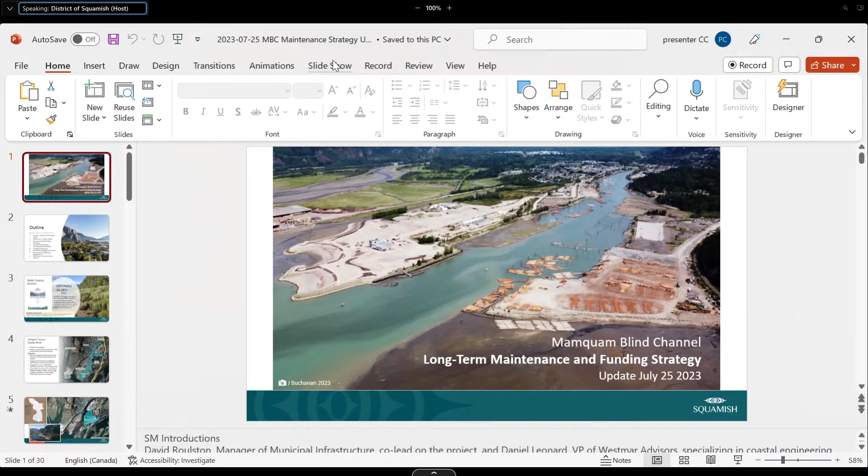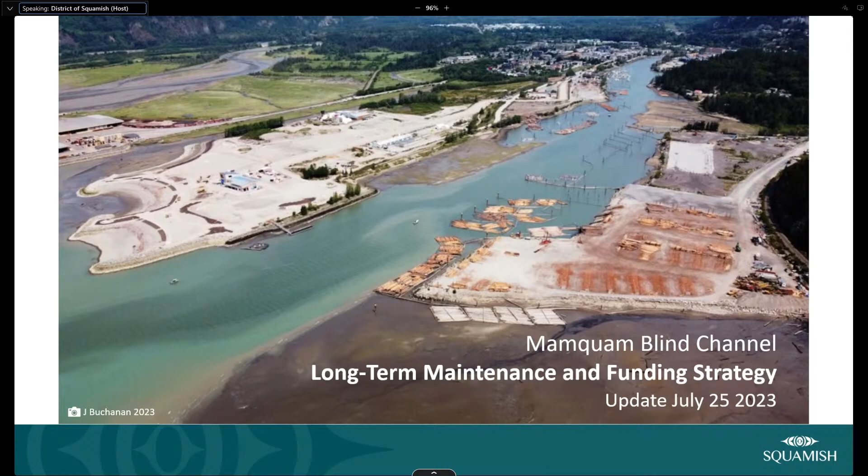Thank you. Hello, Squamish Council and community tuning in. My name is Sarah McJannet, a community planner. With me, I have David Roulston, manager of municipal infrastructure and co-lead on the project, and also Daniel Leonard, who's vice president of Westmar Advisors, a firm specializing in coastal engineering and marine infrastructure projects who's been engaged on this project.

So today, our purpose is to present an early draft of the Mamquam Blind Channel Maintenance Strategy to solicit comment from council on our work to date prior to seeking broader community input. We'll situate the strategy, speak briefly to the work plan and our engagement activities since we introduced the project to you last April. We'd like to summarize the draft strategy formation, including guiding principles, review of channel maintenance options and funding tools, and then talk to the preferred options emerging from discussions with our community working group, as well as cost estimates for maintenance work. As noted in the staff report, we're aiming to engage with the broader community, and we've shared some next steps for additional activities before developing final recommendations and bringing the strategy back to council in the fall.

So in 2016, the OCP update identified several policies and guidelines for channel maintenance, dredging, and restoration. You can see policy 20.24E, which set intention to address navigability for transportation access, recreation, and commerce while minimizing impacts. Further to that, leading scoping and collaboration around a channel maintenance strategy was also identified and prioritized in our Marine Action Strategy in 2018.

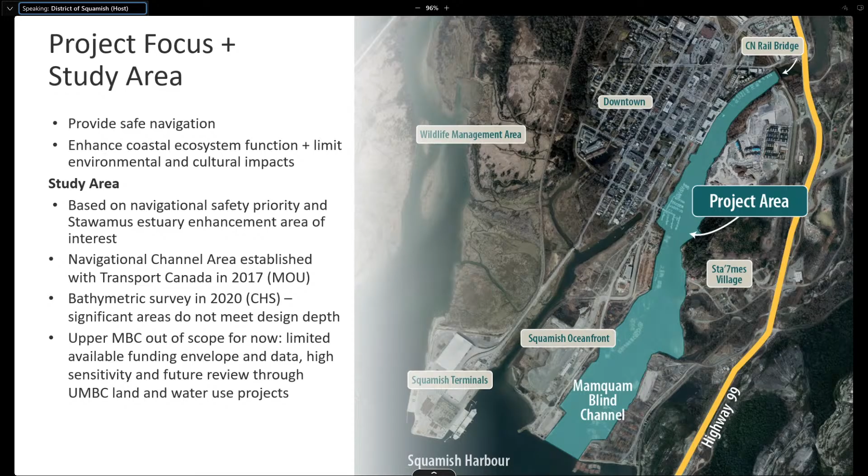I also just wanted to highlight that the channel maintenance study area is on the doorstep of Stá7mes Village and community, where the Stawamus River estuary drains into the Mamquam Blind Channel. The updated area in blue shows the Squamish Nation's expanded lands at Stá7mes that were legally transferred to the nation in 2021 through the addition to reserve process.

And in the draft strategy, we have highlighted the cultural significance and importance of the channel to the Squamish people, where many known seasonal village sites were located and many marine resources were abundant. The Squamish Nation has a strategic plan that includes goals for protecting and managing their lands and waters, including protecting against loss of reserve land from erosion and supporting environmental restoration and sustaining the community.

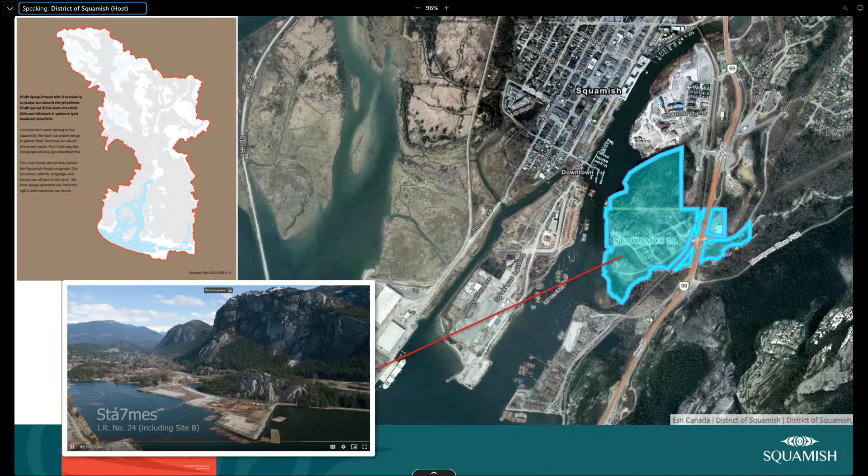And the nation is also, as we presented in the Marine Access Review last month, undertaking significant comprehensive land, marine, and capital planning for Stá7mes and Site B to the south, which is also owned by the nation. So we've been engaging Squamish Nation staff to staff through this project, and we look forward to continued collaborative work. We hope that this work will also help connect with and support the nation's future planning and potential for partnership in future as well. That's just an image of Stá7mes and Site B from the nation's website.

Okay, so in terms of project stages and key tasks, we're in stage 4 of our original project work plan that we presented.

Initial stage 1 involved the scoping, procuring technical services of Westmar, and engagement planning. Stage 2 is all about data gathering and preliminary technical review: review of the bathymetric information, sediment quality data, the navigation channel design, vessel considerations, etc.

In stage 3, through the end of 2022 and earlier this year, we engaged Squamish Nation, other governments, and our community working group in technical review of data and approaches and potential dredging opportunities. As part of this stage, we also talked about benefits and impacts of dredging, as well as what happens if we do nothing.

In stage 4, we've assembled this draft report with maintenance and long-term funding strategies for your initial review to talk about initial directions, and then forthcoming input from council today and from community will help inform how to address dredging and channel enhancement options going forward. And then in stage 5, we're going to summarize all the final recommendations and bring that back in the fall.

A big shout out to our working group, which was formed last summer. Many of them are here with us today in the audience. We have a total of 17 members, a larger group than we had initially set out to include, but it was fantastic to have all of the participation.

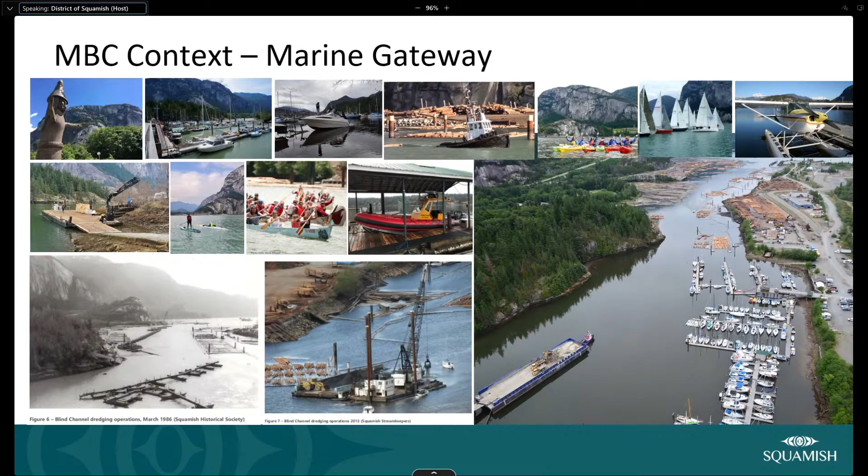Essentially, it's highlighting and acknowledging the cultural and ecological importance of the lands and waters in the channel, respect for Skwxwú7mesh Úxwumixw, rights and title, advancing reconciliation, progressively restoring channel health, preserving safe access, prioritizing waterway safety, and finding a program that's sustainable, practical, and financially viable, designing for future needs, especially in light of climate shifts and new marine opportunities. And also the principle around ensuring benefits and costs are shared amongst the broadest group of beneficiaries in the community. So that's the guiding principles in a nutshell.

I'll just turn it over to David to walk through a couple of other salient points as well.

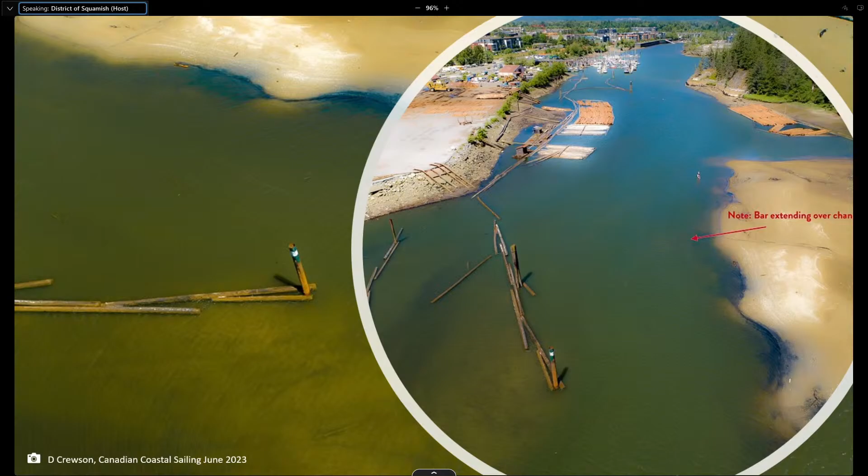In order to determine an appropriate design depth of the channel, Westmar reviewed vessels that use the channel along with their under keel clearance, which is the clearance between the deepest portion of the boat and the channel bed. Various dredge depths were evaluated to determine what percentage of the time those vessels can safely navigate the channel. Based on that review, it was determined that a dredge depth of -2.6 meters chart datum would allow the largest vessel that uses the channel to safely navigate about 85% of the time. To achieve that depth through the whole Mamquam blind channel would require a total dredge volume of 68,000 cubic meters.

We have collated sediment data from past data collection exercises, including the 2013 dredging program that the district undertook, as well as testing from some private water lot owners. The findings of that review indicate that some areas have mercury and hydrocarbons based on past industrial use, and all areas have elevated copper, which is a result of Britannia Beach mining activities over the past century.

The areas with mercury and hydrocarbons will require sediment to be disposed of at a certified landfill, and disposal at sea may be possible for areas that are free of mercury and hydrocarbons, but engagement with federal regulators is required to confirm that. Disposal on land is also considered viable, particularly for near shore sites where sodium and chloride are not expected to have any adverse effects. Disposal on land could take place in the form of land raising, land creation, or potential habitat compensation work within intertidal areas.

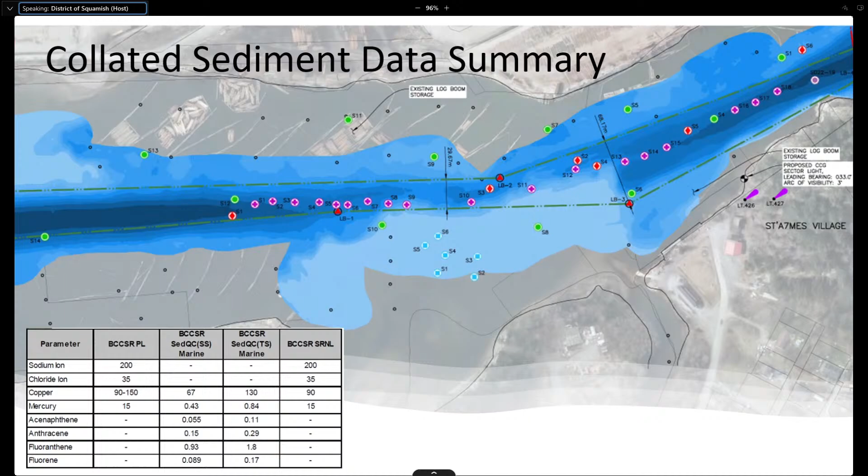The project team evaluated a full range of options to assist with decision-making. This included doing nothing, status quo; a stopgap, which focuses dredging work at the mouth of the Stawamus River; a focus dredge, which would dredge the southern portion of the channel, south of the proposed pedestrian bridge, to a depth of -2.6, and north of the pedestrian bridge to -1.6. Option D is to dredge the entire channel to -2.6, and the highest service level is to dredge the entire channel to -3.2, which would allow all vessels to navigate during all tidal conditions.

So option B and C were identified as the preferred options by the working group, and I can go into further detail on those two options.

Option B, the stopgap, is shown here, focusing work at the mouth of the Stawamus, which is currently the key pinch point. The order of magnitude cost estimate for that is $650,000, based on a number of assumptions that will need to be confirmed at the detailed design stage, for items like how we dispose of the dredge material and what's required from a habitat compensation perspective. This option would address the biggest pinch point in the channel right now, with an aim to improving navigation at low tides.

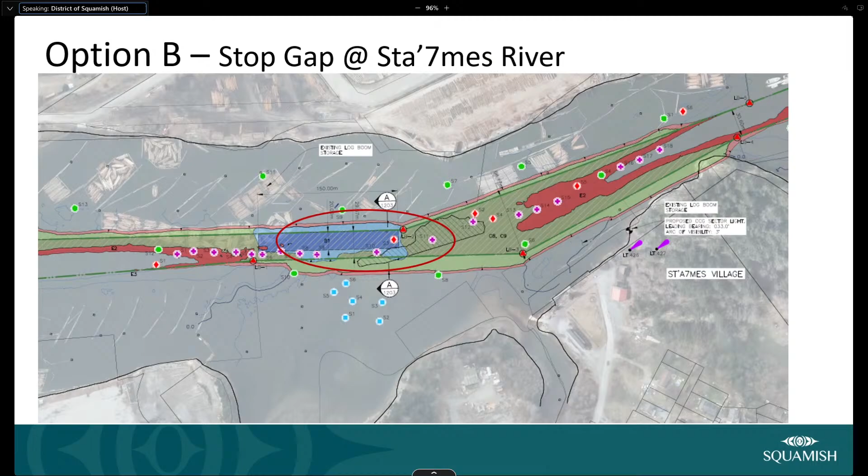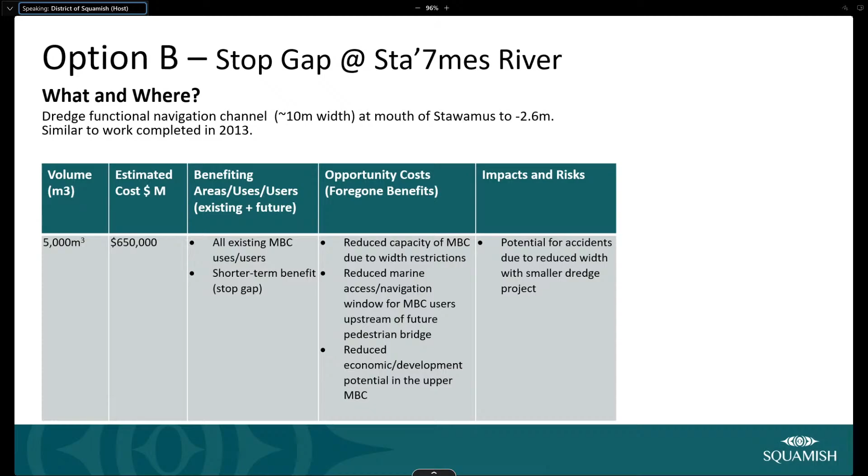This slide provides further details on option B. The key notes are that the estimated volume is 5,000 cubic meters at an estimated cost of $650,000. This would benefit all users of the channel, given its location fairly far south in the channel. It is considered a shorter term benefit due to the limited dredge volume and also because of its location at the mouth of the Stawamus River, which is continually producing sediment at about 2,500 cubic meters per year. It's notable that this is not a full service option, and there are opportunity costs and risks with not proceeding with a more comprehensive option, including reduced marine access that will limit economic potential. There will also remain risk for marine accidents due to the reduced width of the channel achieved with this limited option.

Option C is the focus dredge, shown in hatching on this slide. This is a significantly expanded option beyond the stopgap. Most of the dredging area is in the southern portion of the channel, with a limited portion towards the north end of the channel near the CN rail bridge.

Some highlights of option C: it includes a total volume of about 55,000 cubic meters at an estimated cost of $3.5 million. This option would benefit existing and future marinas within the channel, recreational users, and marine industrial users. However, it doesn't provide a full level of service for all users, so there would be some opportunity costs associated with reduced marine access, including reduced economic potential.

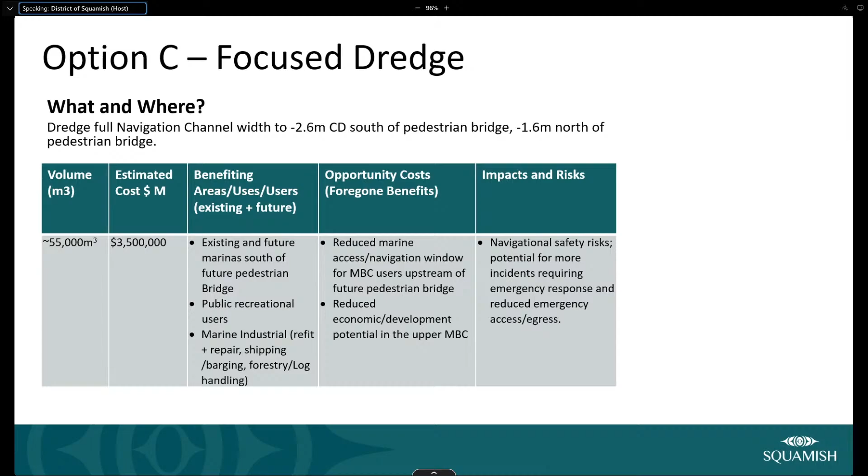With that, I'll hand it back to Sarah to discuss Squamish Nation feedback. Thanks, David. As mentioned, we've engaged staff to staff with Squamish Nation through the formal referrals process, and held staff to staff meetings. Squamish Nation staff also joined an in-person working group meeting with the larger working group, which was great. In terms of the review of options, option C has been highlighted by the nation as the middle ground and the best option to balance environmental needs with costing and cost benefit considerations.

They're very interested in seeing beneficial reuse of uncontaminated material rather than disposal at sea, and have highlighted a focus on the Stawamus area and the estuary area for restoration. They liked the idea of keeping materials close, and also highlighted fill potential for various sites to be evaluated. The nation also highlighted the importance of archaeological assessment prior to any works along the shorelines, and interest in seeing mitigations to reduce impacts on the ecology of the area, such as using silt curtains to avoid impacts to fisheries.

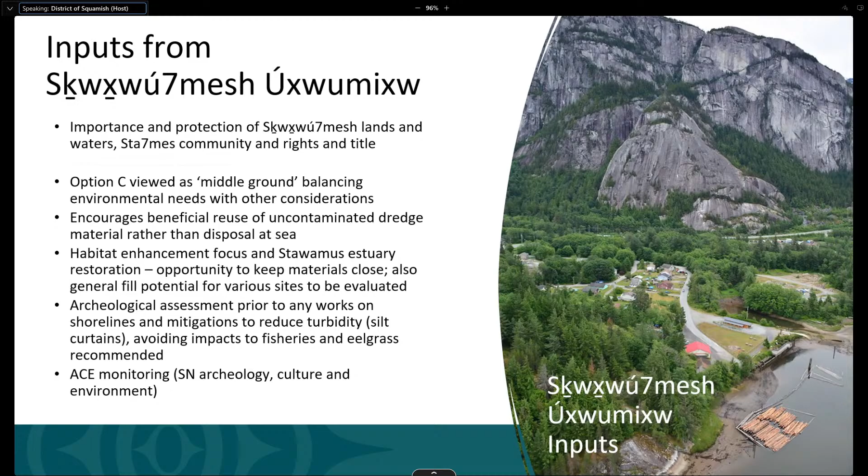There are several variables and uncertainty related to the costs, which we've done our best to assess at this point with appropriate contingencies. One is how much of the material is actually contaminated and can't be disposed of at sea or for beneficial reuse, and has to be taken to a landfill. We have historic data from various projects along the channel, and we've tried to assess appropriate levels of contamination versus uncontaminated materials. But until you actually do a drilling program, you won't know the exact amount of contamination.

As mentioned, the requirements to achieve approval for disposal at sea are getting harder, and the likelihood of getting approval is going down. So we can't really say at this point whether we would get approval for disposal at sea for this project. If we don't, then all of the material would have to go on land, either for beneficial reuse or contaminated or uncontaminated landfill.

We feel much more certain about the actual cost of doing the dredging. We've worked with industry partners, and we have several projects on the go right now, so our level of certainty with respect to actually doing the dredging is much higher than these other issues I mentioned.

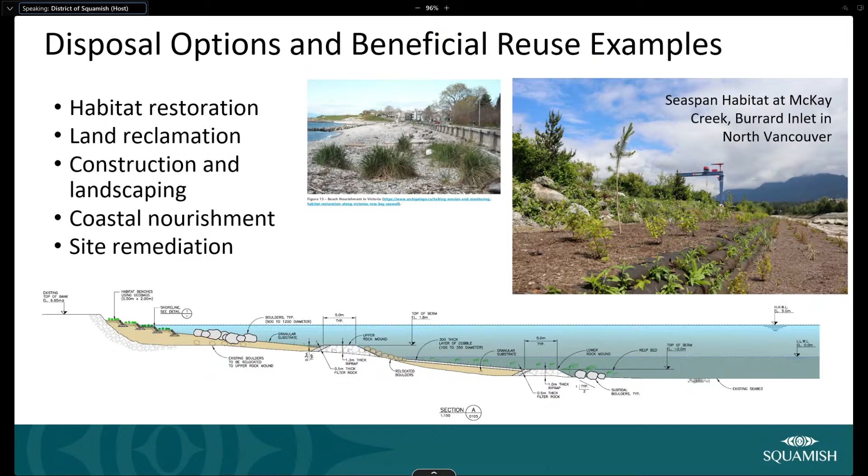The project team, in consultation with the finance department, has reviewed available funding options. There is a notable absence of dedicated federal and provincial funding for navigational maintenance outside of major harbors and ports, and dredging hasn't historically been the requirement of local governments. This leaves a gap in funding, which is a primary reason work hasn't been completed in recent years. Layered onto that are significant financial pressures facing the district, based on funding shortfalls identified in the asset management plan, which challenges the district to make significant investments in dredging.

Based on the review that the project team has completed, funding approaches recommended for further examination include a local service area tax for specific properties that would benefit, user fees and charges, voluntary contributions from users of the channel. We would of course pursue any available federal and provincial grants, however those are uncertain.

For each of the preferred options, the project team intends to complete further analysis prior to completion of this strategy based on council sentiment. That would include grant funding if available, a local service area which could range in funding anywhere from 0 to 100% of costs, the same with general taxation, and then other potential funding sources like user fees and voluntary contributions from different users.

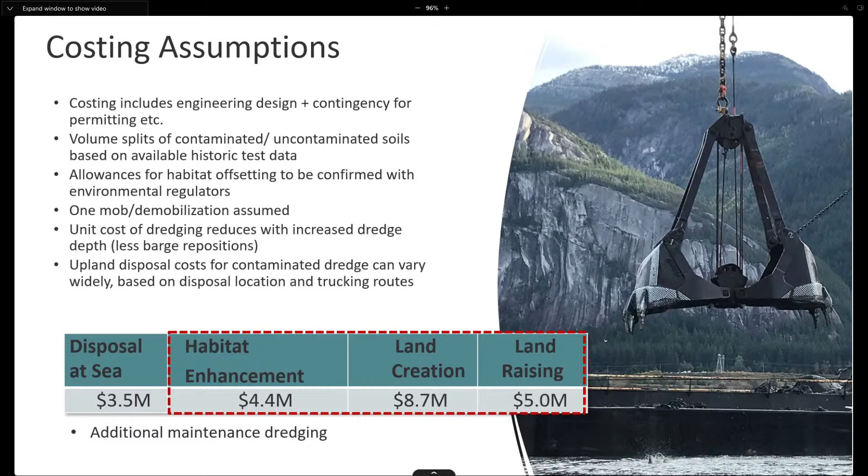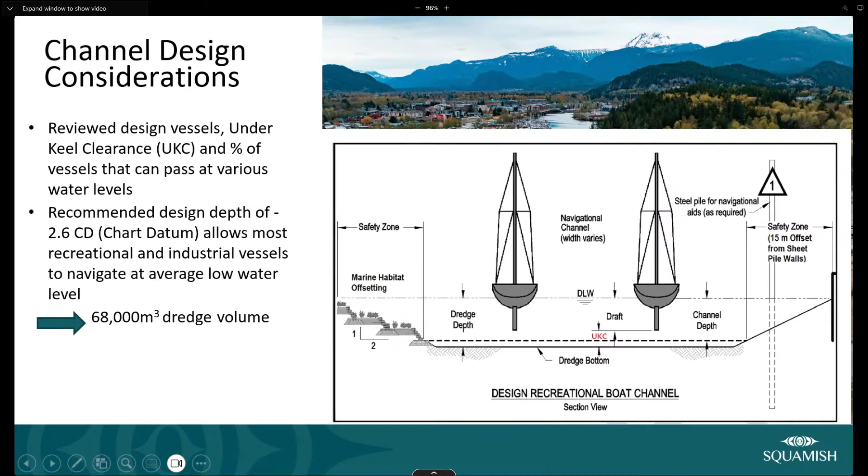That's one more. There we go. Oh. And two more. There we go.

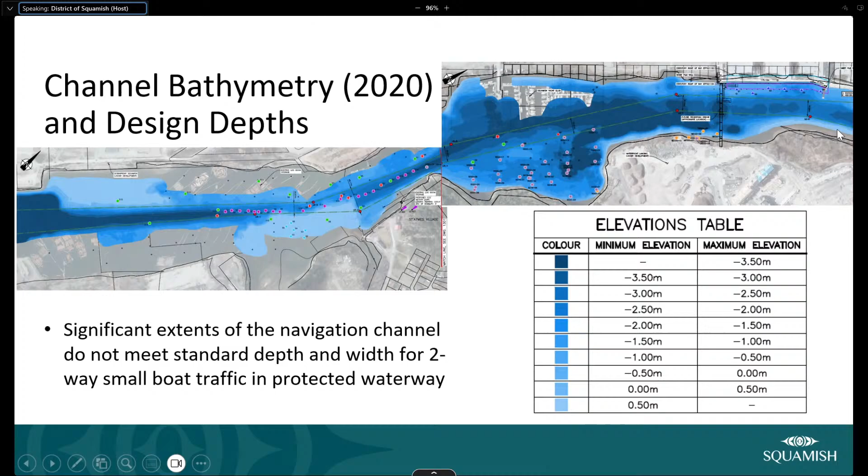This doesn't show the entire channel all the way up to the rail bridge. Through the chair, are you referencing the area north of the Victoria Street right of way, north of the future bridge? Yes, and the future bridge is essentially the boundary of option C, right? Option C is inclusive of areas to the north of the bridge as well as the south. So I'll go back to option C, that's probably the better image. You can see the south channel, the base, and then this is the north channel all the way up to past Newport Marina.

So the area would include the focus dredge at the pinch point near the Squamish, and also areas in the north that are above negative 1.6 meters. North of the pedestrian bridge, the area that would be higher than minus 1.6 is pretty limited. So generally, there are better depths in the northern portion of the channel than in the southern portion. Thank you, I think the piece I was missing was the hash marked bits in the north channel, the problem pieces. That was the clarity I was looking for.

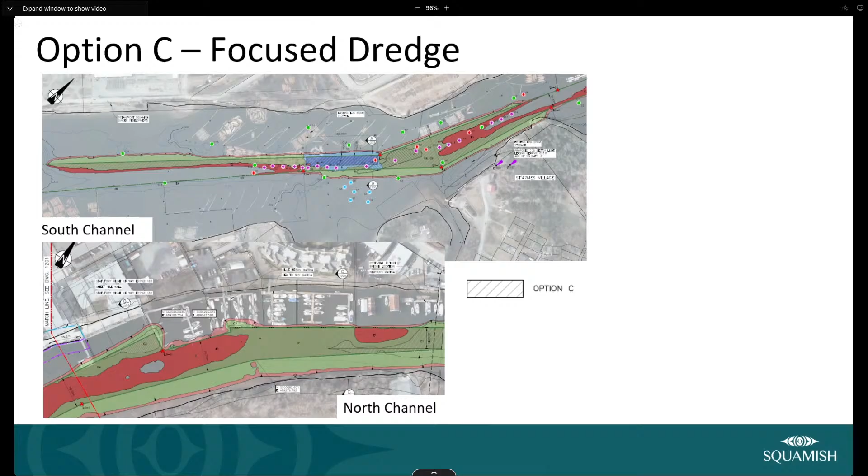The image showing the underwater contours is interesting for portions of the channel, but right at the mouth of the Squamish, we know a lot of material is coming out and we know the channel we'd like to maintain. How far back can we push to add to the shelf life of this project? I know there's been discussion of gravel mining there, thinking that might be an area where the sediment is more recent and potentially less contaminated. How has that been considered so far? And my other question was around frequency to maintain the status, but I think that's been answered. How far back do you push to allow it to come in so we get our frequencies right and don't have discomfort with an exceedingly narrower channel until we do the work again?

I'll make a couple comments and then invite David and Daniel to jump in. In terms of the defined navigational channel area, it's pretty much 30 meters across as you go down the channel from north to south. But in that area, it bumps out a little more, it's wider. In terms of the dredge area, the dredge works and design depths are within that area of travel, that navigation channel.

Then you get into the water lots on the edges where there's activity, uses, and leases. Just south of Squamish you've got Site B and the on-water log storage activity, et cetera. Just beyond that you also have the outflow of the river, which is essentially a small estuary. So it will continue to be a delicate balancing act in terms of creating accessibility and safety for the navigation area without harming that, and there is a little bit of overdredge, a technical term I learned through this process that Daniel can speak to. On the edges it's about that balancing act with the estuary habitat in that area beyond, which is a reserve area as well.

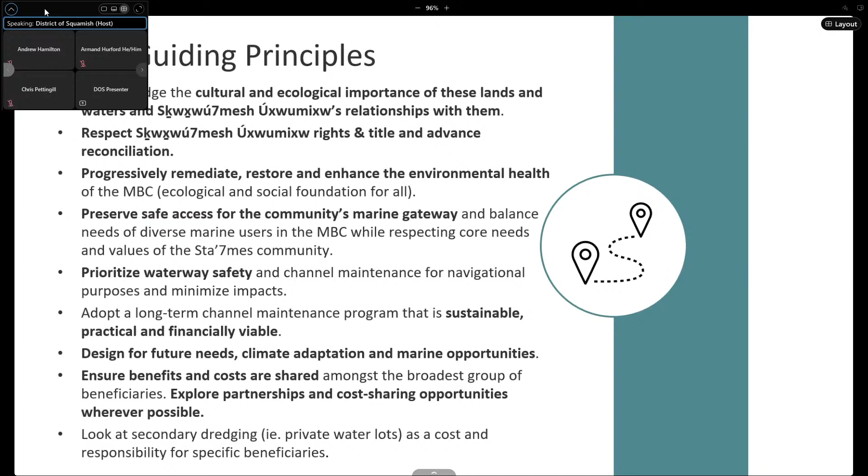Thanks, Chair. A couple quick thoughts. In my past coverage of any dredging or maintenance activities in the Mamquam Blind Channel, I think there's one consistent theme, and it's partnerships. Nobody ever gets anything done, or rarely gets anything done on their own in the Mamquam Blind Channel. It takes cooperation and collaboration amongst the many that have a connection to the channel.

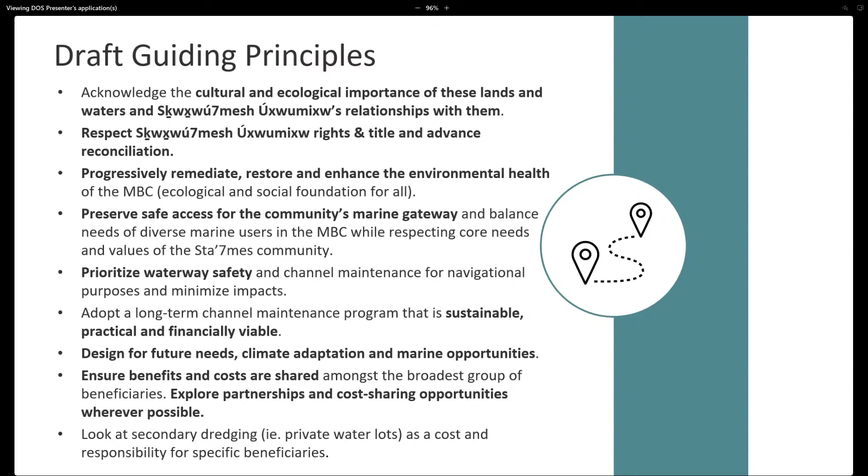I've heard a few times the idea of some kind of catchment area to trap sediment coming down the Squamish, and I think there's some merit to that. Anything that is prevented from entering the channel in such a catchment area, I think has potential revenue opportunities. The material has value. I'm a supporter of future user fees, whether that be in the form of a fee to use a future improved boat launch, or any other way to collect user fees out of the channel.

And option C, as we've seen it presented in the report, I think lands us exactly where we need to be at this point. And I'm saying that as someone who wishes we could be doing more to remove the organic material out of the upper reaches of the Mamquam Blind Channel. But I think that is a nice to have, and option C really puts us in the need to have.

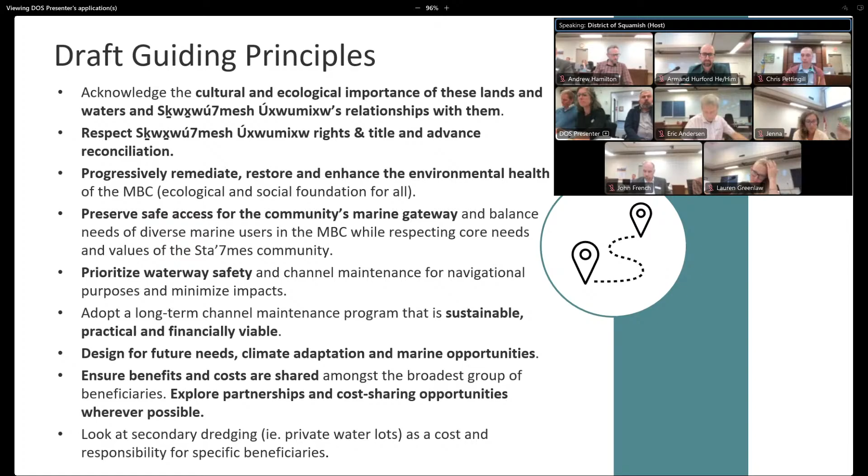Thank you. I'd also like to propose the following motion: that the mayor write a letter to MP Weiler, DFO, Transport Canada, and the BC Ministry of Water, Lands and Resource Stewardship on the challenges of local dredging and the need for dedicated funding for secondary channel maintenance. If it's seconded, I'll speak to it. Okay, Mayor Hurford, I'm seeing a second. Please go ahead, Councillor Stoner. Yeah, thanks.

I want to thank staff for preempting my question about how we actually advance advocacy on this file, given my earlier comments that I really don't think this is something municipal governments should be dealing with. Our best way forward is to take on our advocacy hats and move this forward. Thanks to your recommendations, focusing that with our MP and the federal government is a good starting point. I've also added the BC Ministry of Water, Lands, Resource Stewardship, because they currently have an intentions paper out on a coastal marine strategy for BC. I think there are potentially some synergies there with Minister Cullen, and I look forward to supporting the mayor with any of that if need be.

Mayor Hurford: Just happy to take this on. Earlier in my comments, I spoke to appreciating staff and highlighting this gap, and I'm absolutely happy to take up the torch on that and see what we can accomplish and what partnerships we can realize through this work. So happy to do that.

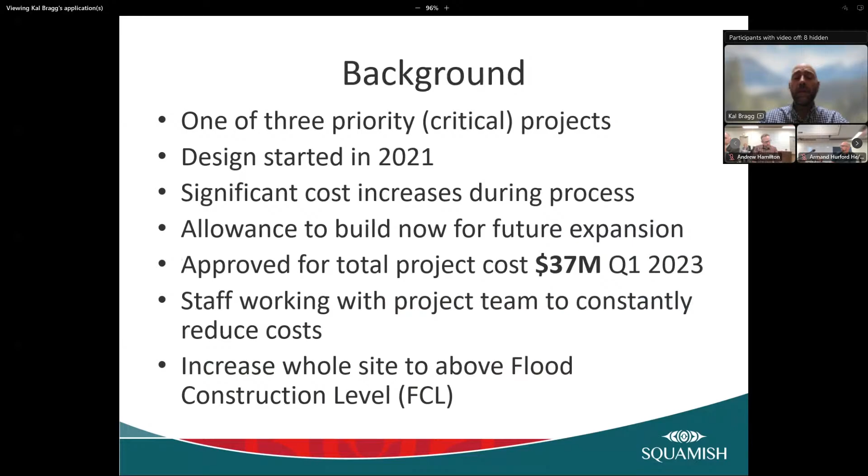Currently, staff are working with the project team to constantly reduce costs. This is called a value engineering process, where we look at the square footage and the design, and we've put a lot of focus on reducing the costs in this project. Staff are also looking at raising the whole site so it sits above the flood construction level. The current focus right now is to get that budget down below $37 million.

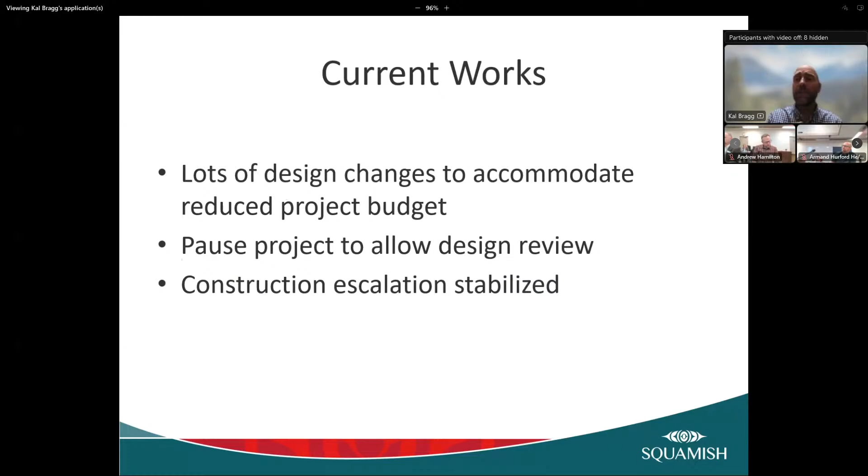We're pausing the project to allow a design review. A point of note is that construction costs have stabilised—there's still escalation, but we're seeing standard escalation, not COVID-level escalation.

The whole yard, or the project, is made up of four areas: the office space, the supporting infrastructure (which includes change rooms, washrooms, dry rooms, and staff areas supporting the maintenance bays), the maintenance bays themselves, which are the core focus of this facility, and the yard space.

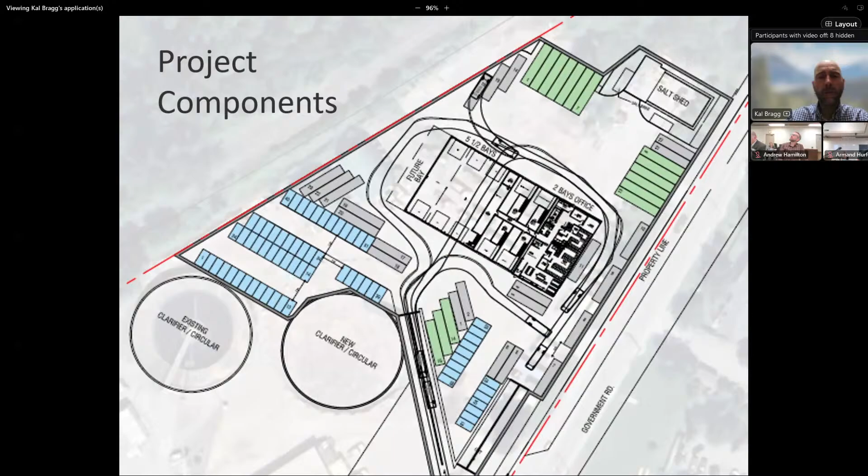At the moment there's a redesign of the building itself, and the focus right now is retaining function while reducing costs. The project team has done this by reducing office square footage primarily, and also by changing the exterior finishes—previously we looked at having a different finish for the office and a different finish for the maintenance bays, whereas now we have a uniform finish.

We're looking at creating a prefabricated frame that we had for the maintenance bays and extending that into the office frame, and reducing sustainability levels. What this does is reduce costs while still meeting BC build code, but it's one area to cut expense. We're also not building the future expansion now, but allowing the plan to have that as an option down the track.

Just a point of note: the maintenance bays and the supporting infrastructure are a core function and remain similar to the initial design.

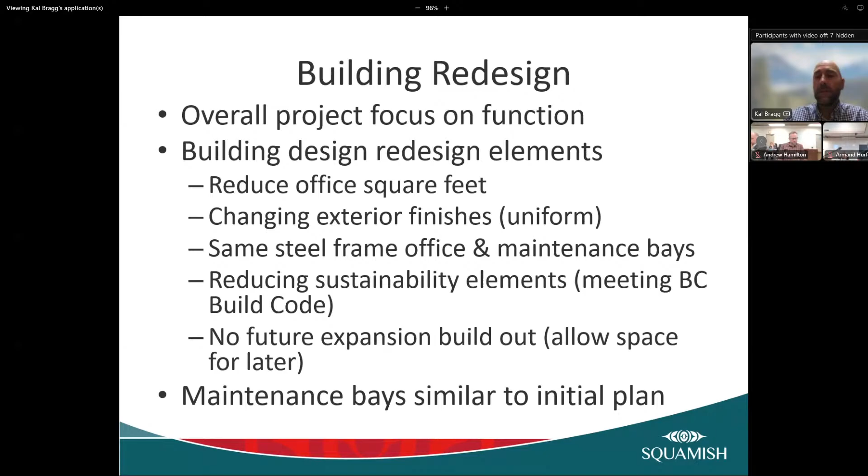There's also a focus on the yard design currently. The office has been changed to push it above the flood construction level. Initially the maintenance bays were below that, but we're now looking at increasing that and having it all at or close to flood construction level.

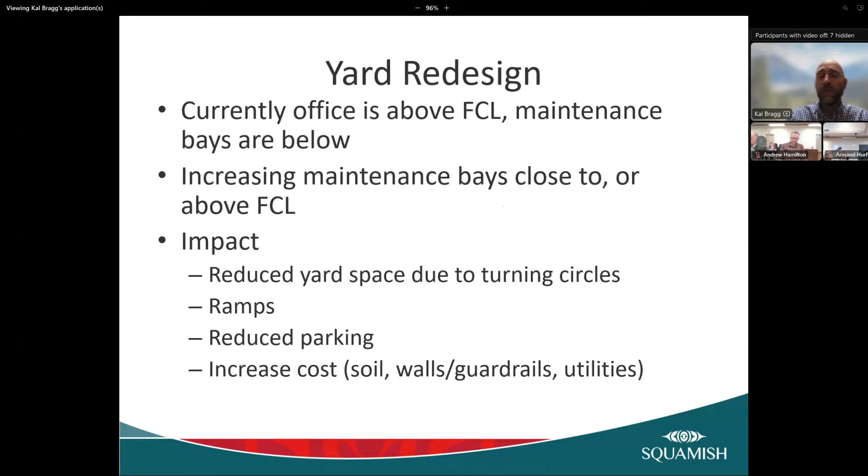This does have an impact on the project, meaning reduced yard space and tighter turning circles for vehicles. There's the addition of ramps, some reduced parking, and increased costs due to the additional soil and the walls and the utilities required to build out the facility.

The new target cost estimate the project team is working to is $32 million, a reduction from $37 million.

Staff also looked at alternative sites—around 13 sites in total, including both government and non-government options: district-owned sites, privately owned sites, sites to purchase, and sites we could potentially partner up with.

The conclusion staff came to is there's little district land available to suit the required size and location. The existing location services the community in the north and south very well. Any purchase would cost roughly plus or minus $6 million to the district if we had to acquire new land, at current market prices.

Any new site purchased would most likely require additional work to bring it up to flood construction level as well. We also looked at whether we could subdivide the current site to offset the cost of purchasing another site, but we can't do that because of encumbrances on the existing site—there's a sponsored Crown grant condition there at the moment.

The next steps staff are working on: over the next month we'll be completing the current plan update, and we're also reviewing the unknowns to meet the floodplain management bylaw, which means bringing it up to flood construction level.